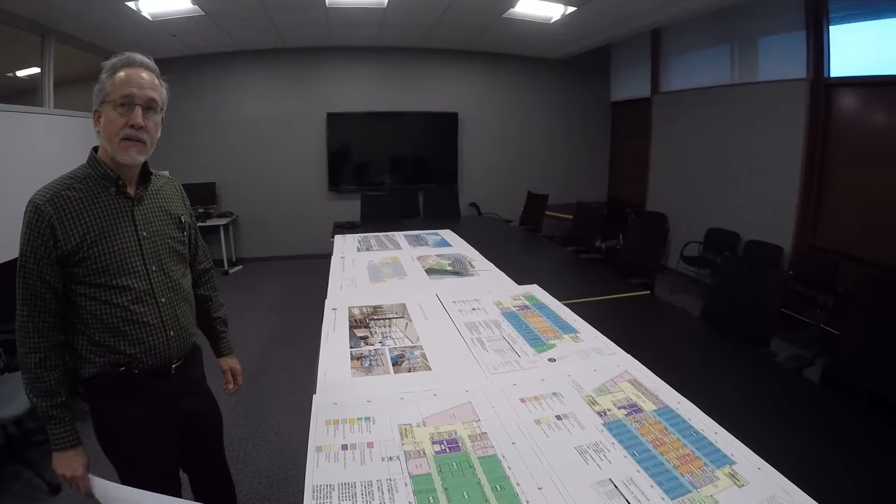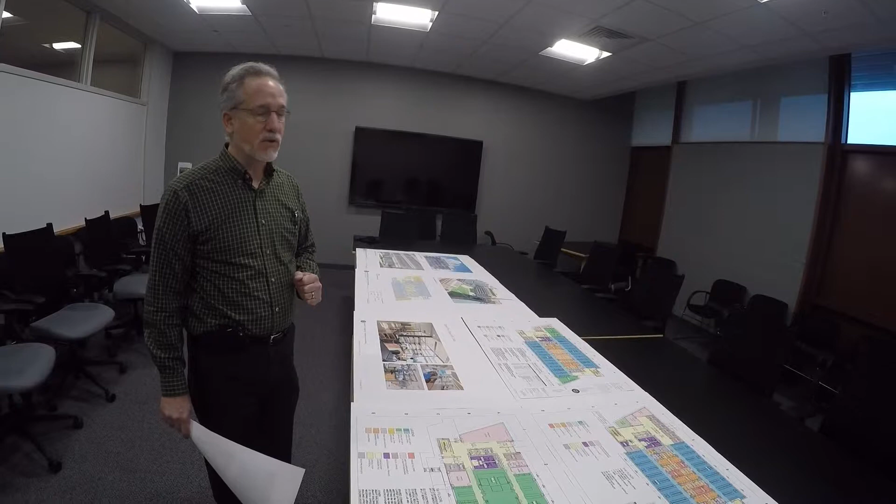Well John, thanks for taking us through this design concept process of the new engineering science building. This building is a 5-story building, mostly meant for research. The research areas are set up for the various departments, and it's meant to be an open lab concept, which is fairly new to the university. Majority of our buildings that hold research have both research labs and office space for the various research grads, assistants, and professors. This is much more simply research areas with support spaces.

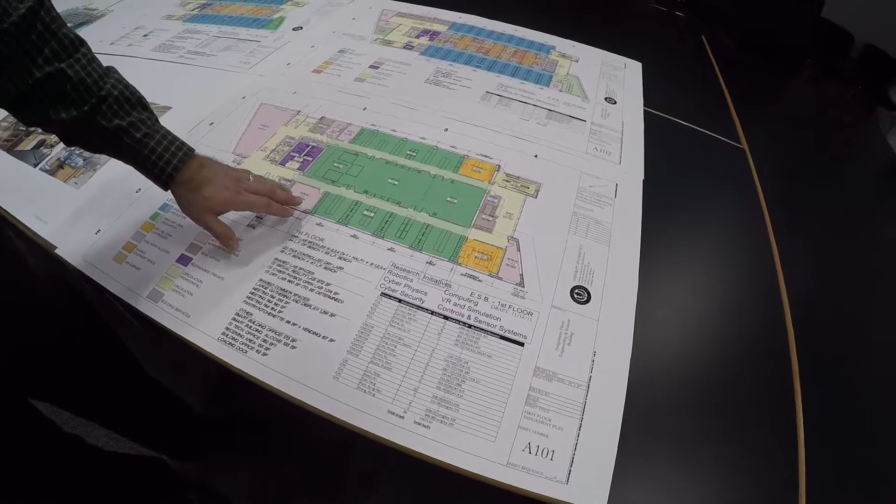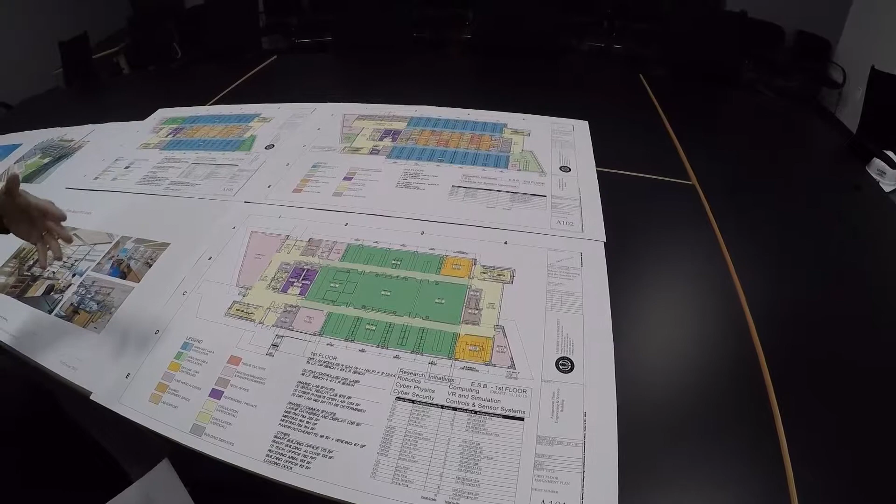On the first floor, some of the departments deal with robotics, cyber physics, cybersecurity, computing, control and sensor systems. You can see that on majority of the floors, the long lengths of the building is where the open lab spaces exist. The center areas are support spaces for the various departments, and depending on which floor, this interior support space got divided up differently to support their needs for extra cold chillers, file space, or other research lab space.

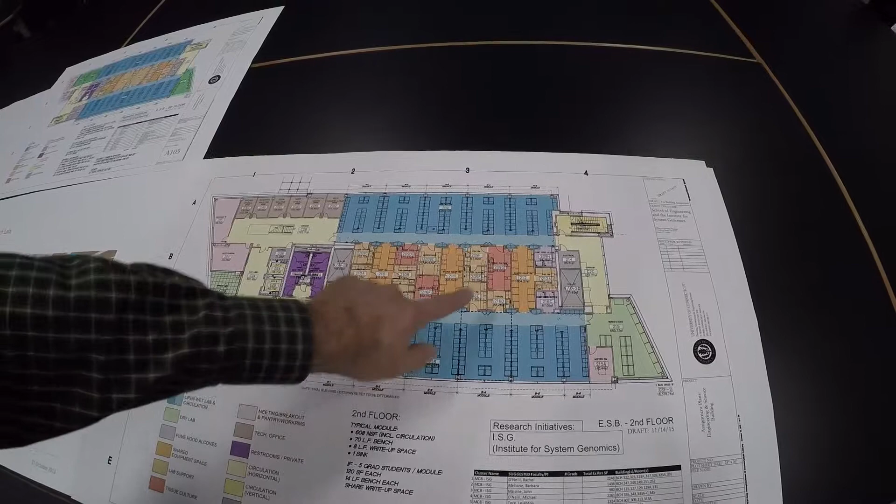The second floor is part of our Institute for System Genomics. Again, the open lab space is on either of the two long sides of the building in that darker blue. The center area is all research area, dealing with equipment rooms, cold storage rooms, tissue culture areas, dark rooms - all divided up slightly different than the floor below, to meet the needs of system genomics.

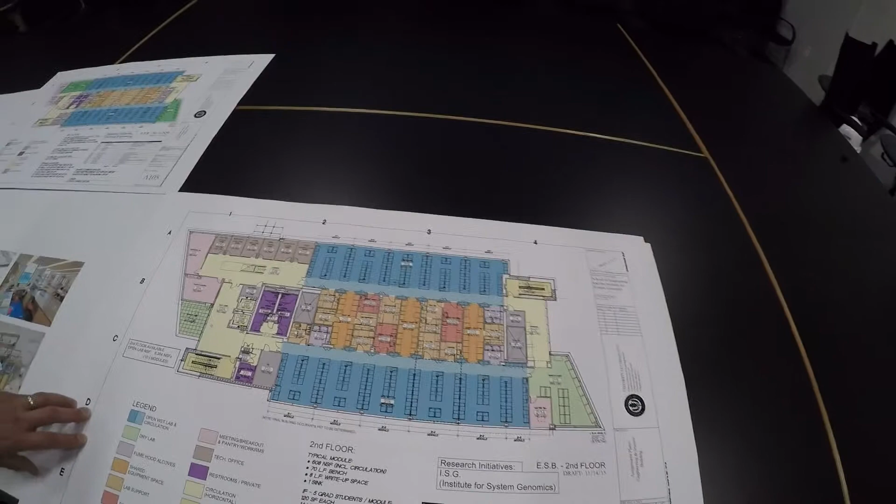So really a science building, with the inner portions for the ante rooms, the service chases, and the labs on the perimeter. The service chases came up in multiple locations, stacked throughout the building. Being that this is a research building, there were a tremendous amount of fume hoods on the various floors, so we do have fairly large chases to bring all of that ductwork up into play.

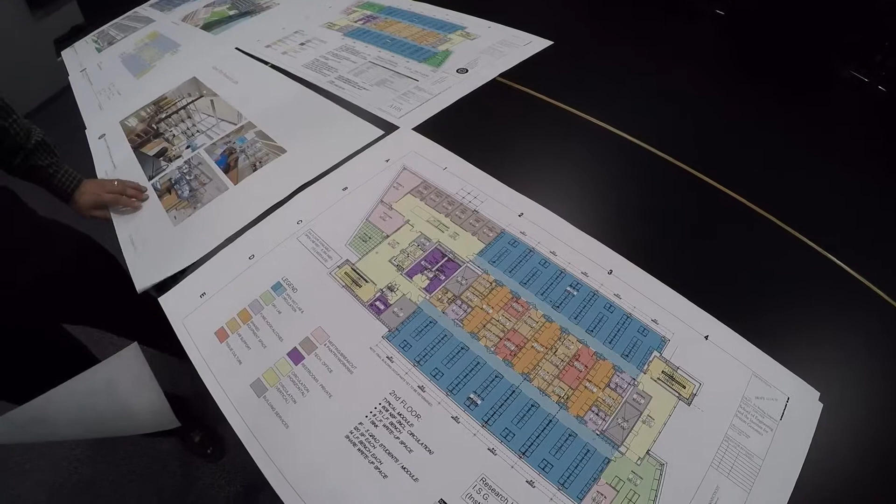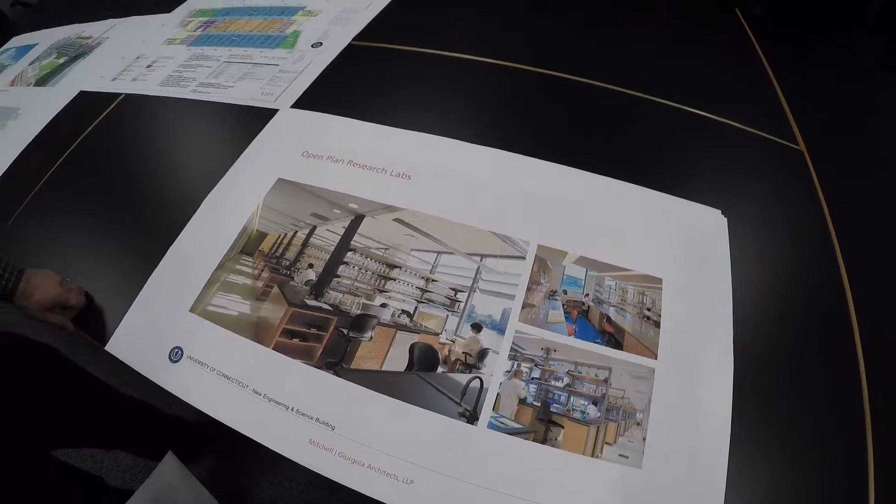5 stories, John? 5 stories of research lab space. This drawing is really an indication of the image that was presented very early on to the university of what the architect's vision was for open lab space, so that the researchers, professors, and stakeholders putting forth the program would understand what we would end up getting at the end of the day.

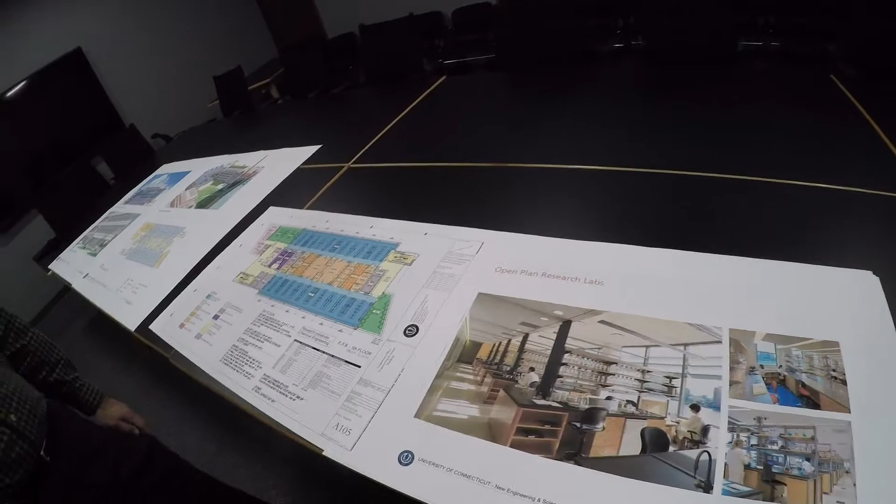This is an interior rendering of our building, but shows what it will look like once complete. So a lot different than we normally have - usually there might be 1 or 2 benches inside a classroom. In this open concept, it's completely wide open, one end to the other. These are the various benches, similar to that photograph of another building at another university. That happens on both the long ends of the building. The center is all support space and shaft space for all the fume hoods.

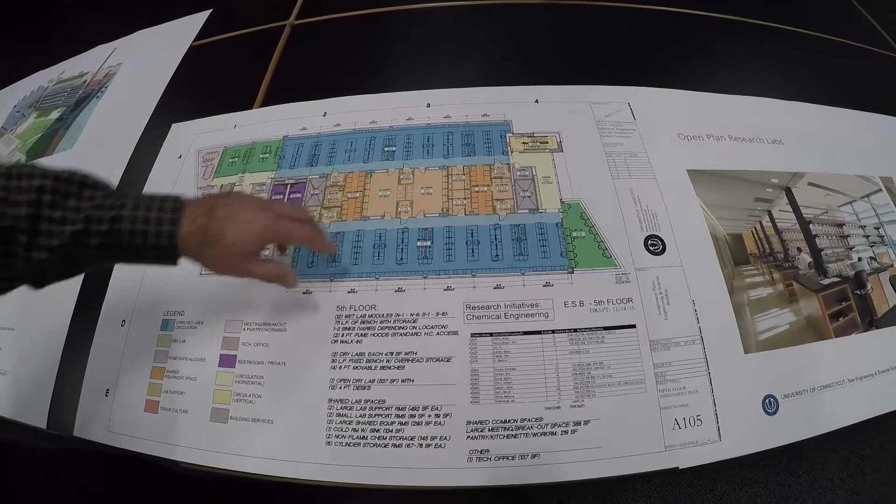The front area of the building was meant for dry labs, some vertical circulation, and other meeting space, as well as the elevators and service items such as bathrooms for the various people. So John, give us a little orientation on the location of the building.

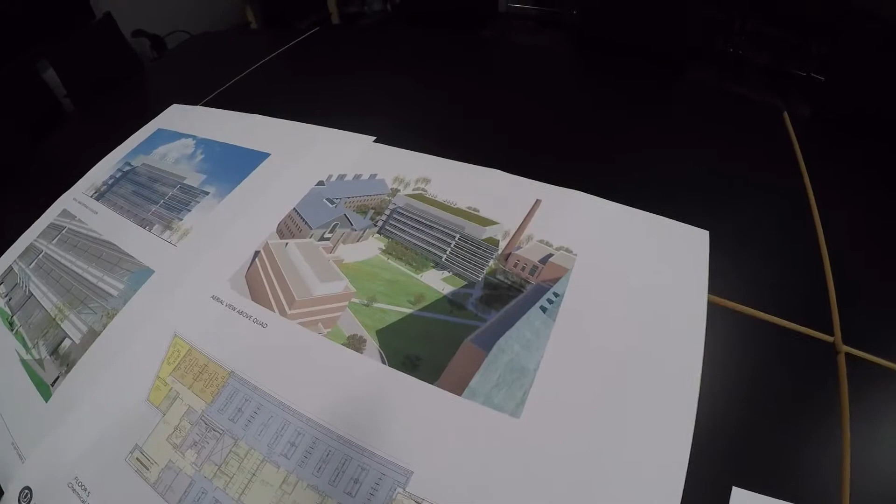This here is the engineering science building. Our utility plant, the CUP, is located on one side. We've got the chemistry building and other engineering buildings surrounding it, giving us a quad. Actually underneath this ground area is our animal research area that takes place below in the vivarium.

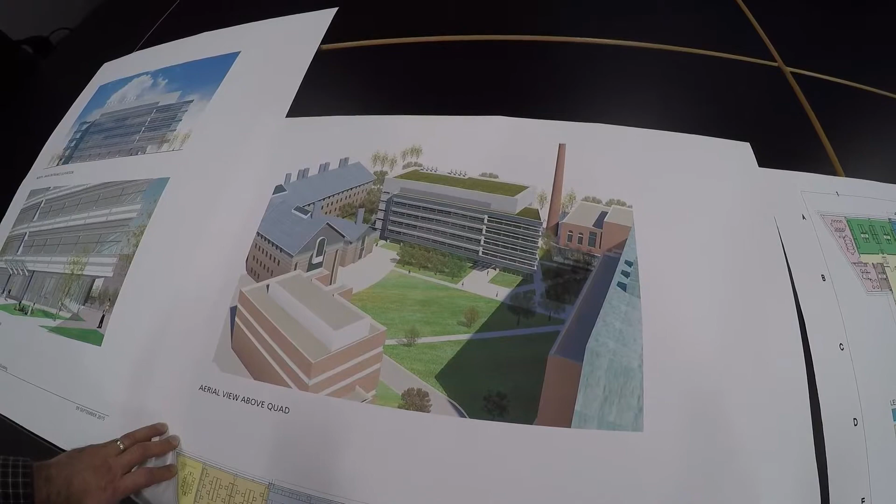We're also using green roof technology as part of this to help with our rainwater, and that is assisting greatly in meeting our goals of sustainability. This last drawing illustrates some of the materials of the north main entrance of the building.

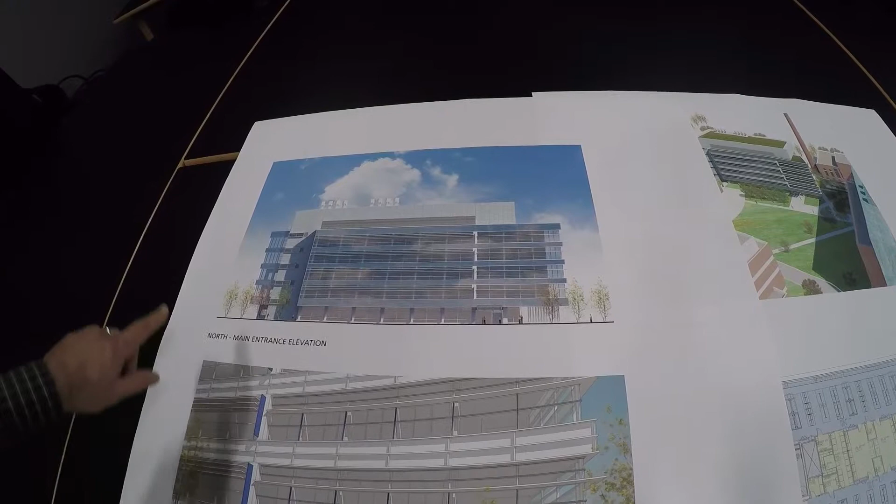Very contemporary, with glass, metal, and masonry tile. It's a rain screen design, so air is able to move behind all of the tile material. Rain screen technology - it's basically just hung off the main wall where the insulation and vapor barriers exist.

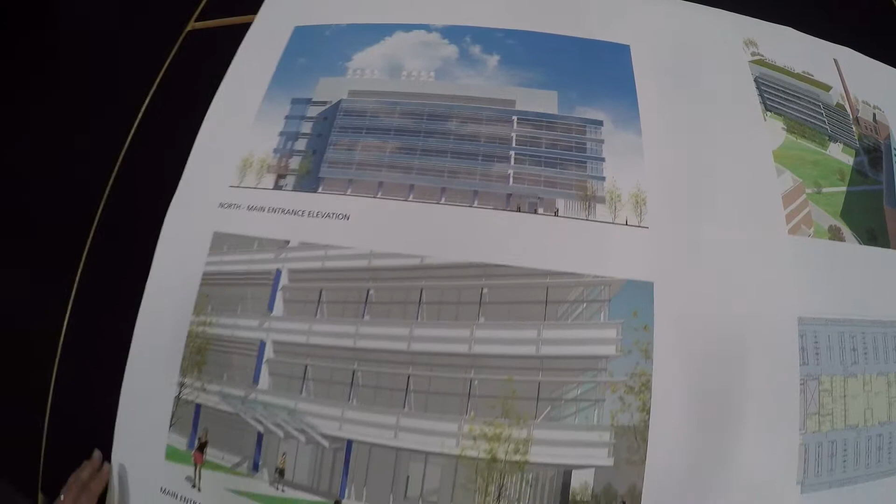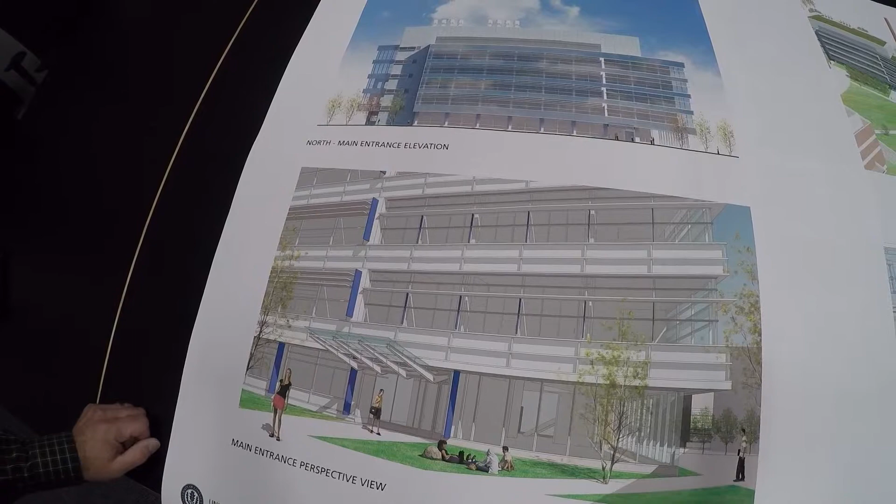This is a perspective rendering of the entrance that leads to the quad. Again, you can see quite a contemporary design concept with metal panel, glass, and an entrance canopy. There's also some solar shading to help with energy gains and losses through the building, depending on the time of year and where the sun rotates around the building.

So it's quite a high-tech building. We look forward to having it up and operational in a couple years, as it's now a big open hole - foundations are just beginning. Thanks, John, for taking us through the design and concept process. We look forward to our first visit in the field.